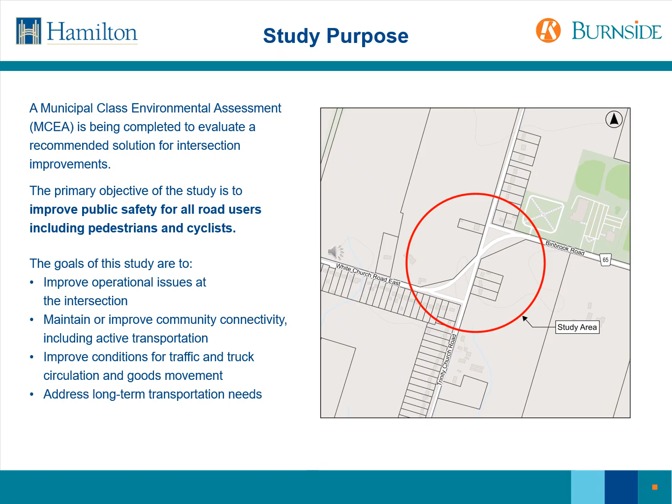The Public Information Center was held on November 18, 2025 at the Glanbrook Arena as a drop-in style open house with project information displayed around the room and representatives from the study team present to answer questions as well as discuss the project with interested members of the public. The PIC information materials were posted on the city's project webpage following the PIC for the public to view and download anytime during the PIC comment period from November 18 to December 9, 2025. A copy of the PIC information materials is provided in Appendix B.

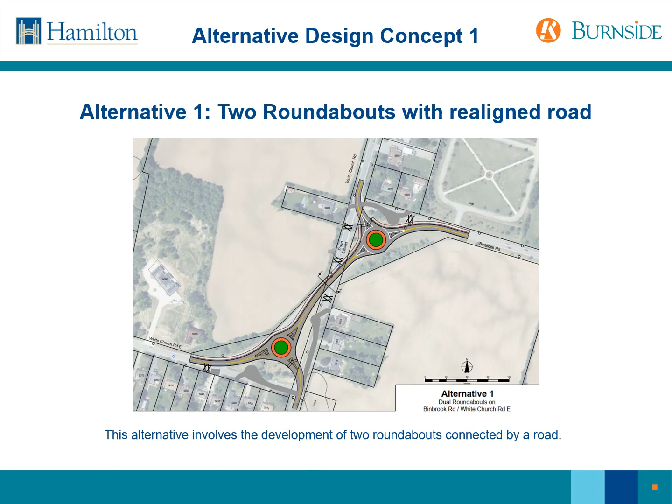This design concept would have some impact to vegetation and associated impact to wildlife habitat. Direct impact to terrestrial species is not anticipated with the implementation of avoidance and timing windows for vegetation removal associated with construction. This alternative has no anticipated impact to built heritage or cultural heritage landscape features associated with the roundabout footprint. Detailed design can avoid impact to cultural heritage features. There is some impact to potential archaeological resources anticipated as a result of earthworks associated with the roundabout footprint. This will require a Stage 2 archaeological assessment in select areas.

The second alternative design concept involves the development of 2 signalized intersections connected by a road. Intersections have more conflict points than roundabouts, having a slightly lower level of safety for active transportation. At the previous PIC, residents indicated a lower preference and comfort for signalization.

This design concept would have some impact to vegetation and associated impact to wildlife habitat. Direct impact to terrestrial species is not anticipated with the implementation of avoidance and timing windows for vegetation removal associated with construction. This alternative has no anticipated impact to built heritage or cultural heritage landscape features associated with the roundabout footprint. Detailed design can avoid impact to cultural heritage features. There is some impact to potential archaeological resources anticipated as a result of earthworks associated with the roundabout footprint. This will require Stage 2 archaeological assessment in select areas.

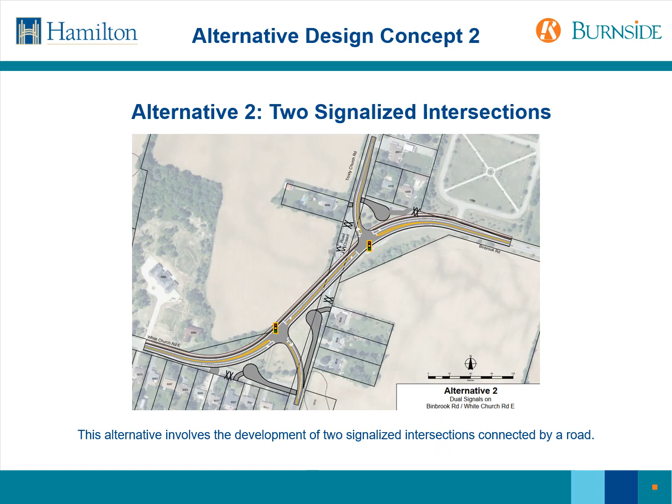The third alternative design concept maintains the existing Trinity Church Road and involves the development of 2 signalized intersections. As with design concept 2, intersections have more conflict points than roundabouts, having a slightly lower level of safety for active transportation. At the previous PIC, residents indicated lower preference and comfort for signalization. This alternative uses the existing road alignment and therefore has minimal impact to vegetation and associated impact to wildlife habitat, and no anticipated species at risk impacts.

Direct impact to terrestrial species is not anticipated, with the implementation of avoidance and timing windows for vegetation removal associated with construction. This alternative has no anticipated impact to built heritage or cultural heritage landscape features associated with a roundabout footprint. Detailed design can avoid impact to cultural heritage features. There is no anticipated impact to potential archaeological resources with use of existing road alignment, as the area has previously been disturbed and does not retain archaeological potential.

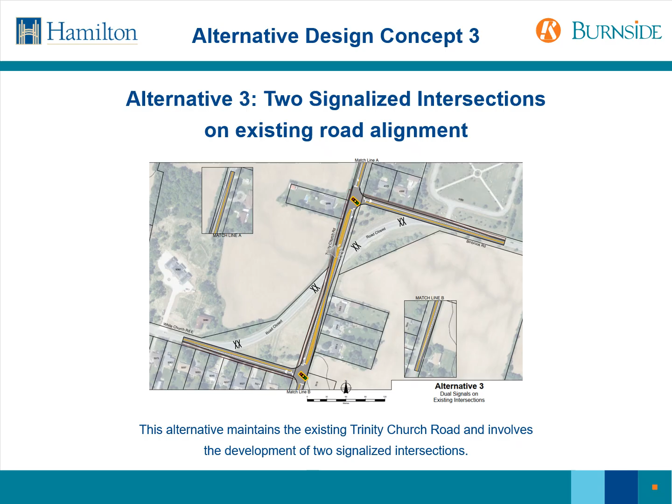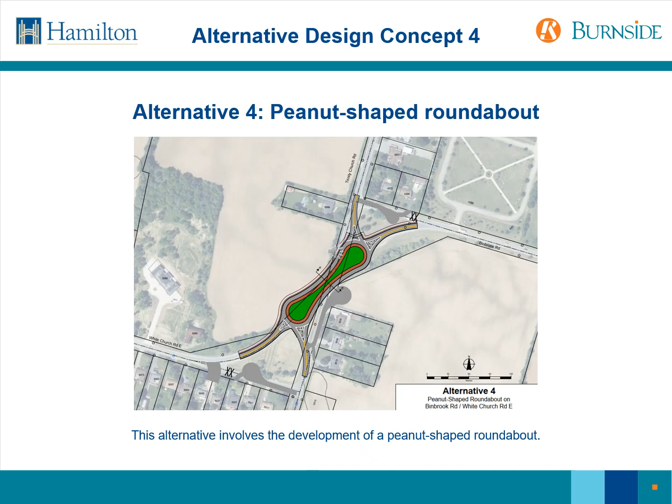The fourth alternative design concept involves the development of a peanut-shaped roundabout. A peanut roundabout has the same function as a circular roundabout, but it comes in a different shape. Like the other designs, this peanut roundabout would not have any significant design constraints, but the peanut shape may have greater complexity of construction. Similar to other design concepts, this option is able to accommodate snow storage. However, the configuration results in some snow clearing challenges. The fifth alternative design concept maintains the existing Trinity Church Road and involves the development of two roundabouts.

The impacts of the alternative solutions are evaluated against the inventory of the natural, sociocultural, financial, and technical environment of the study area, including possible mitigating measures. A summary of the criteria is provided under each environment category.

The natural environment criteria will be evaluated based on the potential impact of the alternatives on natural resources within the study area. This includes impacts to groundwater resources and drainage, in addition to areas such as bird, insect, and other wildlife habitats. The areas of impact will be evaluated based on anticipated construction activities and limits of disturbance to each alternative. The extent of impacts and the ability to mitigate such impacts or provide enhancements to the natural environment will help determine the evaluation of the alternative.

The sociocultural environment criteria included consideration for potential to impact heritage resources such as archaeology and cultural heritage resources. Nuisance impacts such as noise, visual impacts, construction impacts are also considered, along with the impact to driveway access and land or property acquisition needs. This criteria also includes how well the alternatives conform to municipal and agency policy.

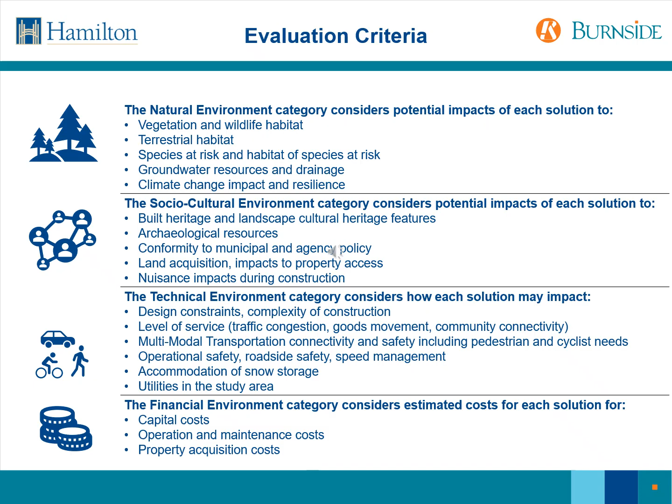Between the 5 alternatives, Alternative 1, 2 roundabouts with road realignment, was found to be the most preferred overall and therefore is the preliminary preferred solution. We are presenting this solution at this PIC to see what residents think about this, and will use your comments as input as part of finalizing the preferred solution before moving on to finalize this in the environmental study report.

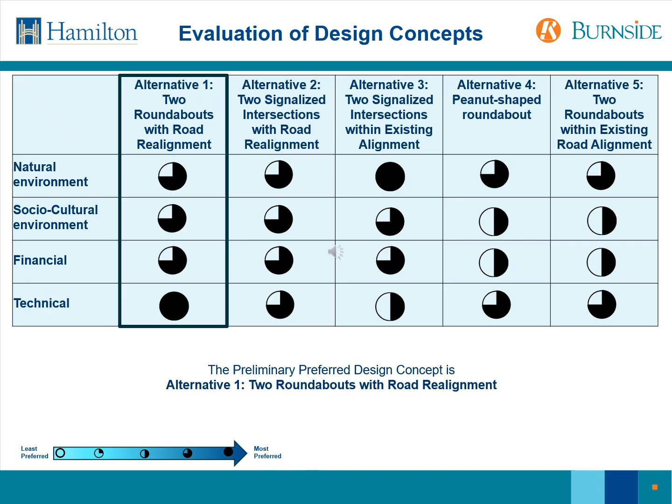As noted on the previous slide, the preferred is Preliminary Preferred Design Concept 1, 2 roundabouts with road realignment. Key points from the evaluation include the following. Under natural environment, this design has minor impact to vegetation to accommodate roundabout footprint and minor anticipated impact to terrestrial habitat and species at risk. Under sociocultural environment, a Stage 2 archaeological assessment will be required during the detailed design phase. There is no anticipated impact to the heritage property, and there is no anticipated impact to potential built heritage resource or cultural heritage landscapes.

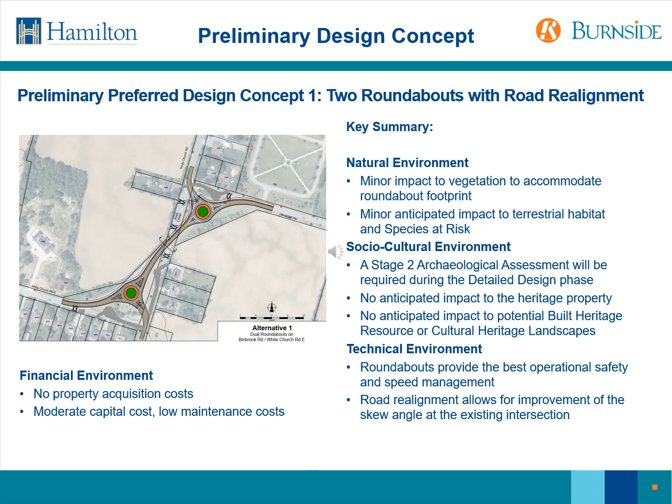Under technical environment, roundabouts provide the best operational safety and speed management, and road realignment allows for improvement of the skewed angle at the existing intersection. Under financial environment, there are no property acquisition costs, moderate capital cost, and low maintenance costs. This road cross-section provides an initial look into what the preliminary preferred design concept would look like for road users.

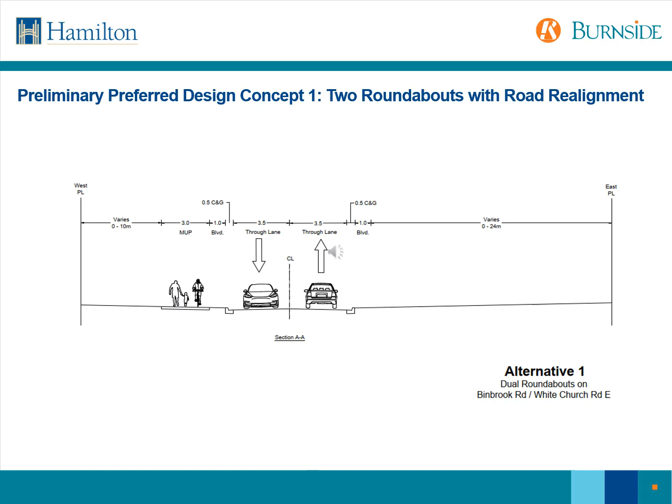During this spring and summer, we will review and consider feedback following PIC number 2. There is a 3-week comment period to allow you to share your thoughts. Please provide comments by June 11th, 2026. Confirm preferred design concept based on feedback received. During fall and winter, we will complete the environmental study report and subsequently issue the notice of study completion. This notice will start a 30-day public review period for the report, during which time you can provide comments. If you would like to receive the notice of study completion, including a link to the environmental study report, please ensure that you have joined the mailing list.

Thank you for listening to this presentation of the Public Information Center materials. As we mentioned, public consultation is a very important part of this study. During the 3-week comment period from May 21st to June 11th, you are invited to provide comments on this study. Our team will be reviewing and considering comments to determine if there is a need to reevaluate or confirm the preferred design. Should you wish to be added to the project contact list, please feel free to contact one of the project team members.